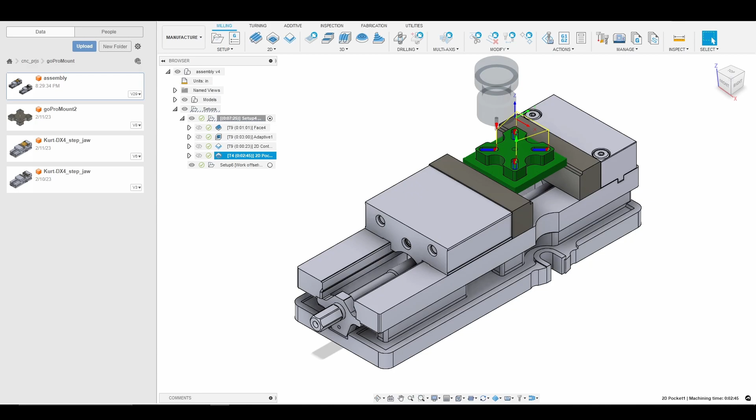Today we are going to go through some of the drill operations for our GoPro mount. So we're going to jump right in and go into our spot drilling operation. So we're going to go to drilling. I'm going to go into my 770m+ library and I'm going to select a 1/4 inch 140 degree spot drill.

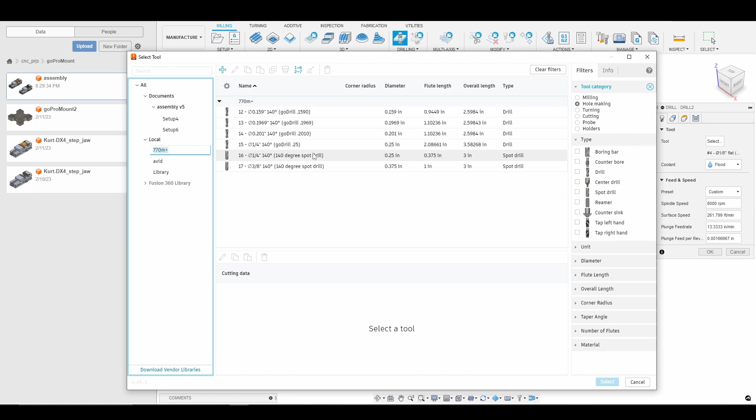Now remember that 140 degrees because here in a minute we're going to jump over to PowerPoint and do some basic trigonometry, so you want to remember that 140 degree angle. So we'll select that, we'll select OK. So we're going 8,000 RPM and we are plunging down at 13 inches per minute. We'll go to geometry and then we'll go ahead and select our hole.

Now our heights tab is going to be very important. So we want to make sure our bottom height is hole top. However, we will crash if we leave it at hole bottom. So this is a spot drill. We want to make sure we check hole top, and then we are going to go down minus 45 thousandths. And we will get into why we're going down 45 thousandths here in just a second.

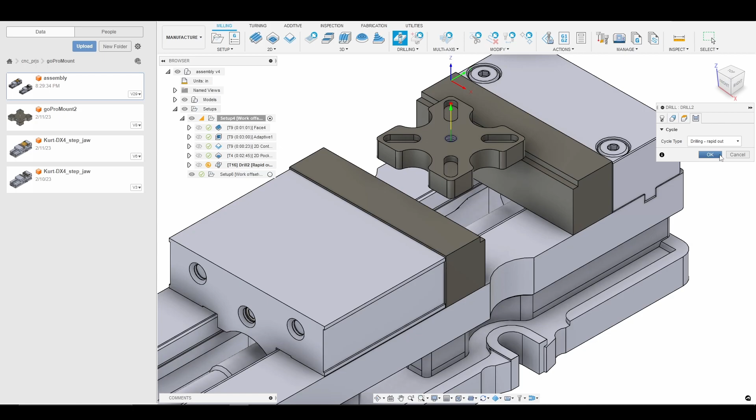Okay, so that should be fine. And our cycle, we're just doing a drilling with a rapid out. So we'll click OK. And now what I will do is go ahead and simulate. This will be very quick. We go down, we perform our spot, and then we go out. All right, so that's good. So what I'm going to do now is hop over to PowerPoint.

All right, so why did I go down into the stock 45 thousandths? So the first assumption I'm going to make is that we are making a 1/4-20 hole. So I'm going to assume the diameter of our hole is going to be 1/4 of an inch, which just happens to be the same diameter of our carbide spot drill. So I want to put the entire tip of the drill into the material. And so to do that, I need to find the height here, which is what I have labeled as X. And so to do that, we're going to use some basic trigonometry.

So you notice I have a line splitting the angle or the tip of the drill in two. Remember I said our drill point angle was 140 degrees. So if we split that angle in two, half of it is 70 degrees. We know from basic properties of triangles that all of the angles inside must add up to 180 degrees. So if we have 70, we have 90, and then we have 20, that is our 180 degrees. The next thing we need to remember is basic trigonometry.

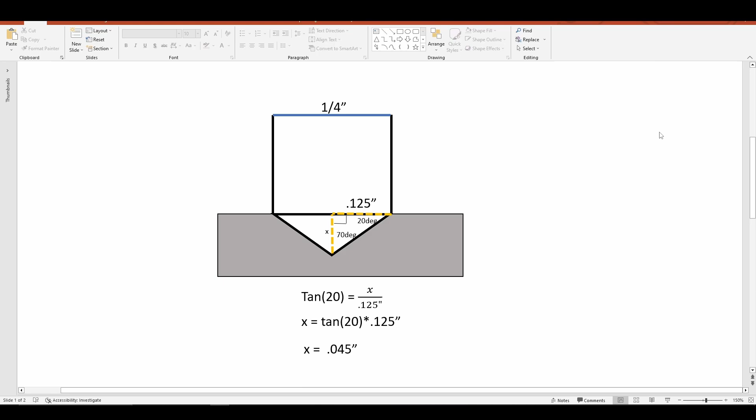All right, so now what we're going to want to do is drill all the way through our part and then through the bottom of our stock. And so to do this, I'm going to go for another drilling operation. And I am going to select my tool. So I'm going to go to my 770m+ library and select a Go drill that is 201 thousandths in diameter. So I'm going to click OK. We're going 4,000 RPM and we're plunging down at 15 inches per minute. We'll go to our geometry and select our hole.

We'll go to our heights tab. Again, our heights tab is very important. So we want to start at the top of the hole and we want to finish not at the bottom of the hole, but at the bottom of the stock. So we'll select stock bottom. And now what we also want to do is go ahead and put the tip of the drill through the bottom of our stock. So we'll hover over that so you can see what I mean.

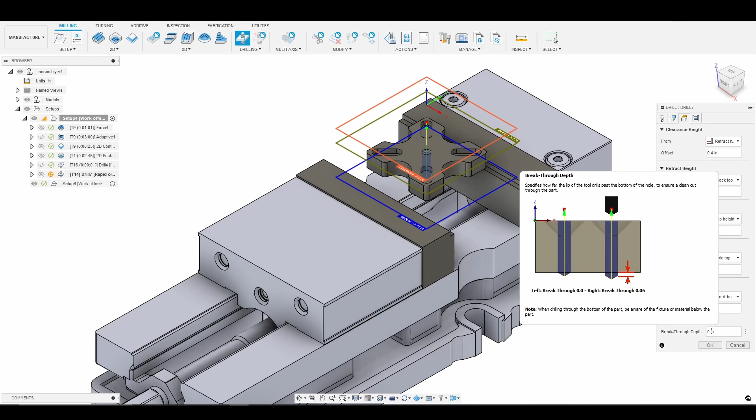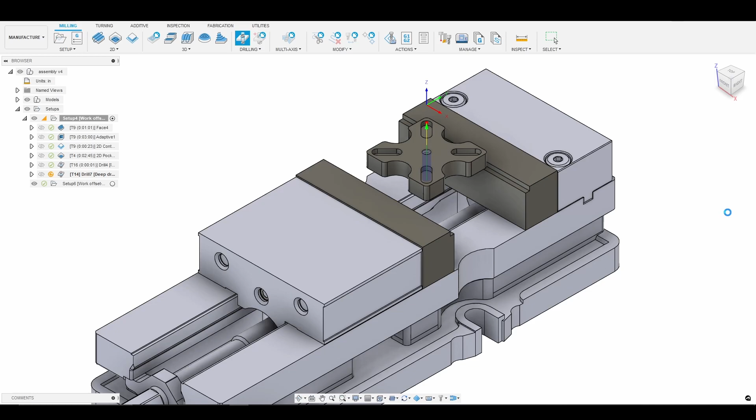So we'll select that. And then I'm actually going to add a breakthrough distance of 50 thousandths just to make sure that our drill point does indeed go all the way through the bottom of the stock. So I'll go ahead and do that. And then I will select OK after I go through the cycle. And we want to use a deep drilling with a full retract. I'm going to round the pecking depth to 50 thousandths, and I'm just going to set the minimum pecking depth to 30 thousandths. I'm going to click OK. And then what we'll do is we'll go ahead and simulate.

And I will go to the right side here. And what I'm going to do is actually just use the timeline to make it easier to control. So you see we're pecking in the center of our part. And what we want to make sure is that we go all the way through the bottom of our stock. So let's see if that happens.

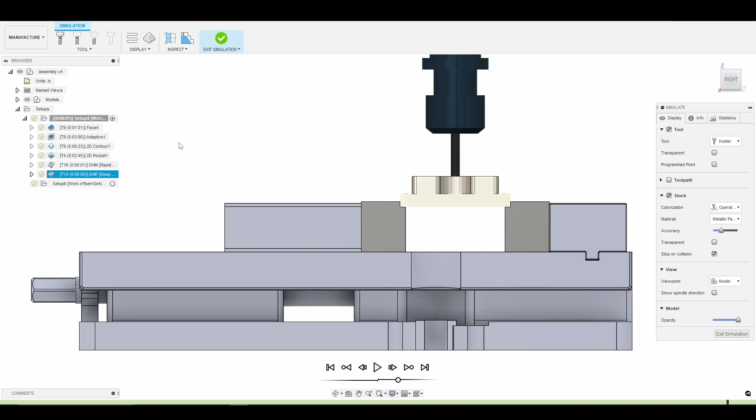There we go. So let's go back a little bit. There we broke through the bottom of our stock. And there we go, just a little deeper to get that breakthrough distance that we talked about. So I think our drilling operation there is fine. So we'll go ahead and exit. We'll go back to the home view.

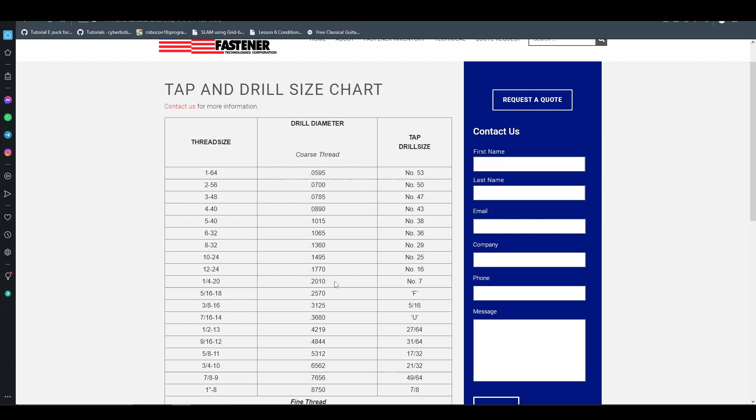So what we're going to do next is go ahead and chamfer around the top of the hole. And so I guess what's important to specify before we jump into that chamfer path is why I chose 201 thousandths for the diameter of the drill. So what you want to do is go to a drill and tap guide. So I pulled one up here from the internet. And if we go to the 1/4 hole, we can see that our drill diameter is 201 thousandths, which is exactly what I used. So that's how you would determine the size of the drill that you would use.

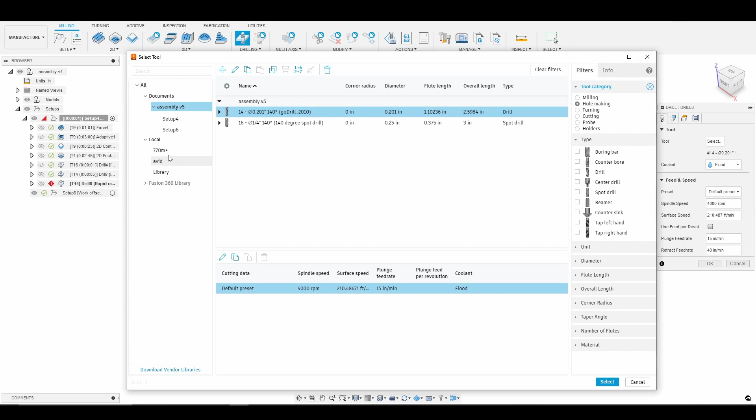Okay, so now we'll go back to Fusion, and what we'll do is go ahead and do another drilling operation, but this one is going to be slightly interesting because instead of a drill, we're going to use a chamfer tool. So drilling operation, we're going to select our tool. We're going to go to the 770M+ library, and you'll notice that our chamfer mills don't show up here. And so all we need to do is go to tool category, and instead of hole making, go ahead and choose milling. And then we will find our 3/8 inch 45-degree chamfer.

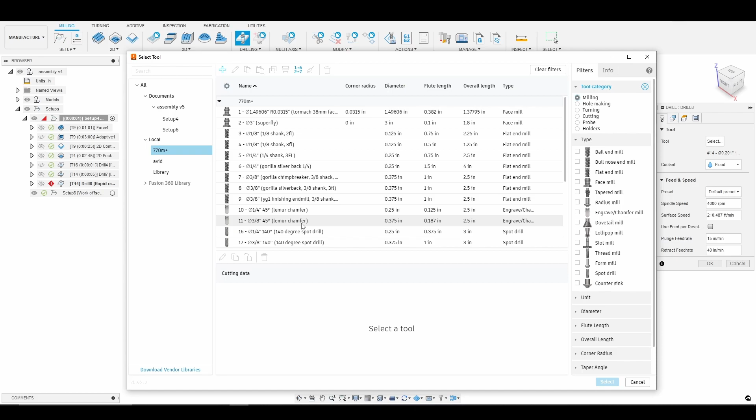Again, we want to put a chamfer on our 1/4 inch hole. All right. So we want our diameter of that chamfer to be wider than our hole. So we're going to use a 3/8 inch chamfer mill. So I will select OK. 4,000 RPM, 15 inches a minute. That's fine. We'll go to geometry.

All right. And the next thing I'm going to do is go to heights. Again, this is important. We don't want to crash into our stock. So we're going to use hole top. And for a bottom height, we're going to use hole top again. And for offset, we're going to use minus 130 thousandths. And I will explain that in detail again in just a minute.

But because the angle at the tip of our chamfer mill is 90 degrees, we can use a special property of a 45 degree 90 right triangle. And so what happens is if we go down half the diameter of the hole that we want to create, we will essentially be flush with the diameter of that hole. So for example, if we wanted our point to be flush with a 1/4 inch hole, we would just go down 1/8 of an inch.

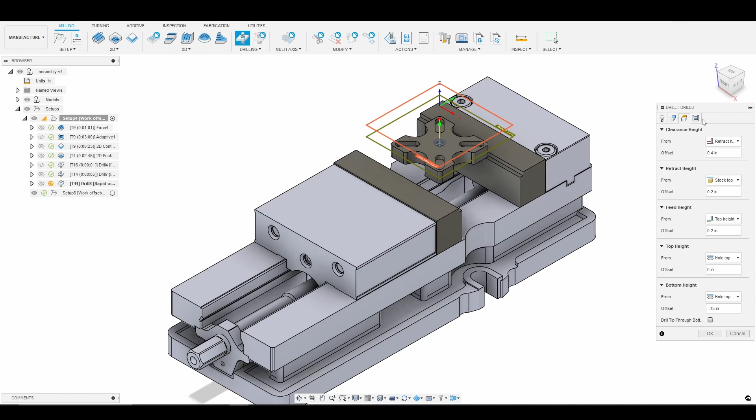So really, if I wanted the chamfer mill to be flush with our 1/4 inch hole, all I would have to do is go half of the diameter or the radius down, and we'll see that in detail here in a minute, and that would be flush with the diameter of our hole, but I'm going to go a little below that just to give us the chamfer. So I'm going 130 thousandths. And again, I'm going to explain that in detail here in just a second. That way nobody's confused. And again, we're just going to drill and rapid out.

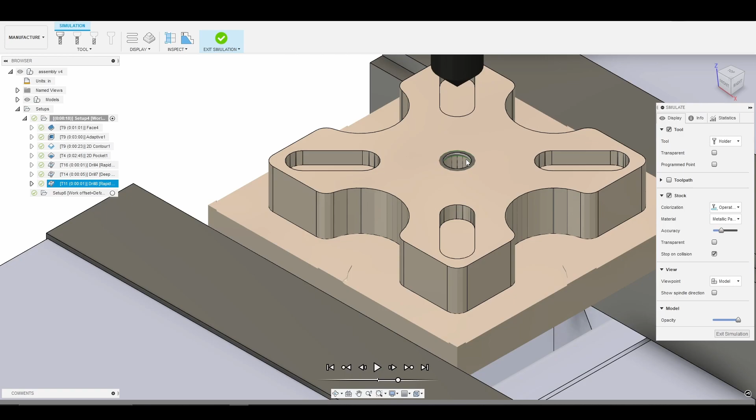So I'll press OK. And we'll go ahead and simulate, and the simulation is going to go fast. It's going to look identical to our spot drill. So we're just going to go down and out. There we go. And there you see it. We just sort of chamfered the hole. So we're going to exit the simulation, and then we'll jump over in PowerPoint, and I'll explain again why we chose the depth that we chose using the 90-degree chamfer tool.

Okay. All right, so again, we're going to do some basic trigonometry. So the difference this time is that our tool is bigger than our hole. So if we look at how our drill point is entering the stock, we're not going all the way down. We're not putting the entire drill point into the stock. So again, we're assuming our 1/4-20 hole is going to be a 1/4 inch in diameter, right?

And so if we split the drill point angle again, half of the diameter of our 1/4 inch hole would just be, again, 1/8 of an inch, or 125 thousandths, which I have drawn here. And so what we want to do is find the depth to go down with our chamfer tool that is now a 90-degree angle instead of 140 degrees.

And so we're going to do the same thing. So half the diameter of the hole, or the radius, is 125 thousandths. We're going to use basic trigonometry. So we split our 90-degree angle in two with the center line. So we have 45 degrees here, 45 degrees here, plus the 90 degrees gives us our 180 degrees. So all of our angles add up to 180 degrees.

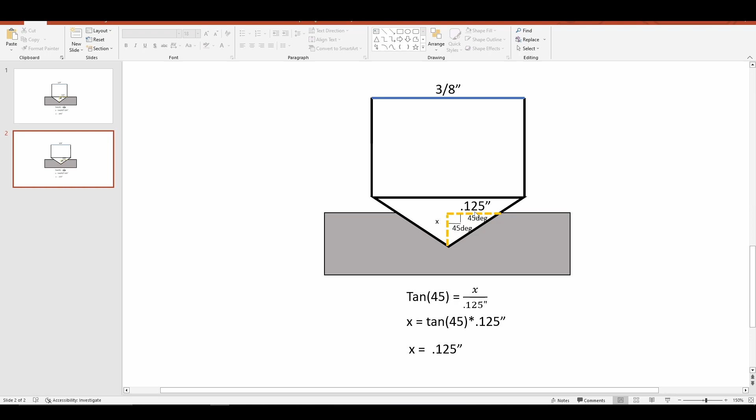And so what I did is I went down just a little further than that to make sure I got a chamfer on the edge of the material. So I went 130 thousandths instead of 125 thousandths. So that's why I went the depth that I went. So we'll go ahead and go back to Fusion 360 now.

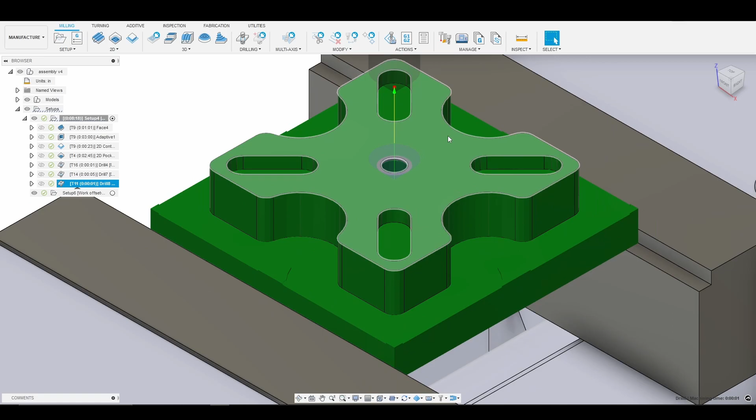And so now what we'll do is we'll go ahead and chamfer the pockets and around the outside of our part. And to emphasize putting the chamfer here, if you toggle back and forth between the drilling operation and the chamfer and just look at the stock, you can see that chamfer being done.

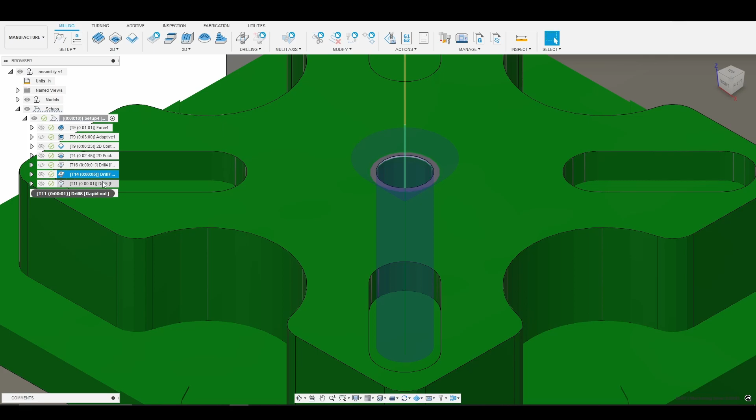Sometimes it's easier to just toggle back and forth between the stock just to see what's happening without going through simulation. So that's just an easy trick if you want to make sure that you really did put a chamfer on your hole. You can just toggle back and forth between two toolpaths and see how the stock changes. So now I'm going to go to 2D, and we're going to go to a chamfer. So we're going to click 2D chamfer.

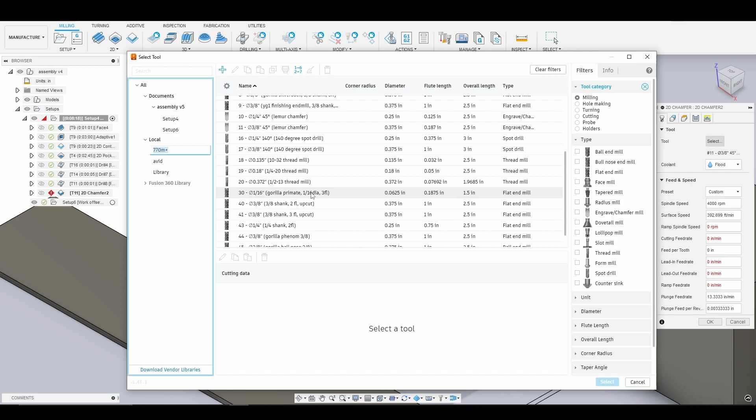We'll go select our tool. We're going to use the same 3/8 inch chamfer mill. So again, let me find it. There it is. We're going to select it, and we are at 4,000 RPM, 20 inches per minute. That gives us right around 1.25 thousandths per tooth. We'll go into our geometry. I'm going to select the contour around the top of the part, and I'm also going to select the contour around all of the pockets.

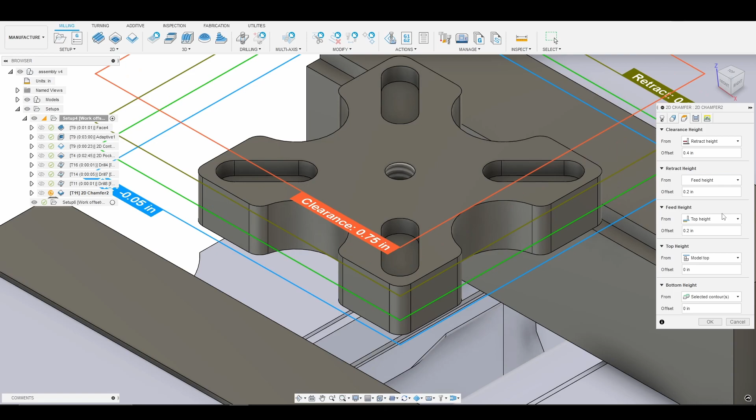We'll go to heights. Again, we've already removed all the material off the top of our part, so I want to be at model top, and I want our retract height to just be our feed height. So that's all good. And the next thing I'm going to do is choose a chamfer width. I like using 15 thousandths, so that's what I use. You can choose whatever makes you happy. You could use 10 thousandths, 5 thousandths, doesn't matter. I'm using 15 thousandths for this part. It's not critical. All right, I'm going to use smoothing and feed optimization.

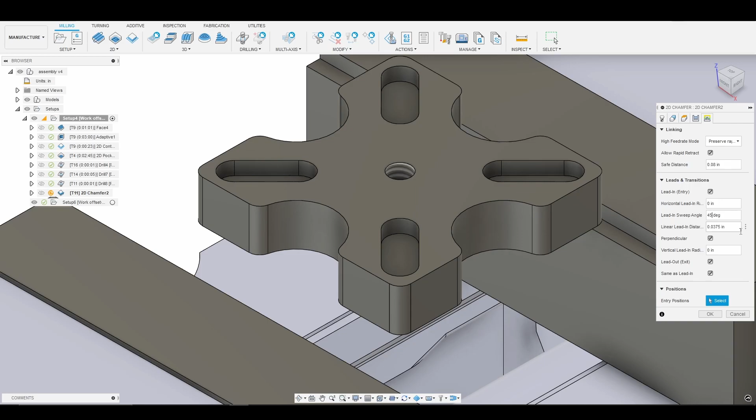We'll now go into linking. And I like coming in at a lead-in sweep angle of 45 degrees. Again, just a user preference. I'm going to click OK. And now we'll just go ahead and simulate this toolpath. So right-click and simulate. And again, I'm just going to move the timeline just because it's easier for me to control and show you guys what's happening.

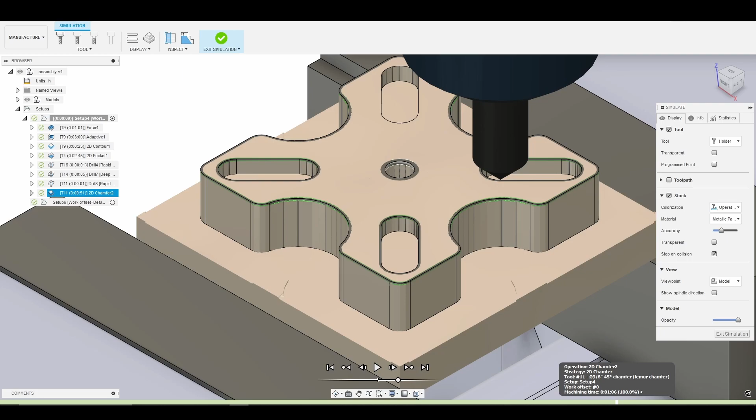Awesome. So we're just going around and chamfering the part. And now we're just finishing up those pockets. All right, that all looks good to me. So I'm going to go ahead and exit. And that does it for this tutorial. So again, we went through the drilling operations, and then we chamfered our part. So in the next tutorial, we will go over the thread milling.

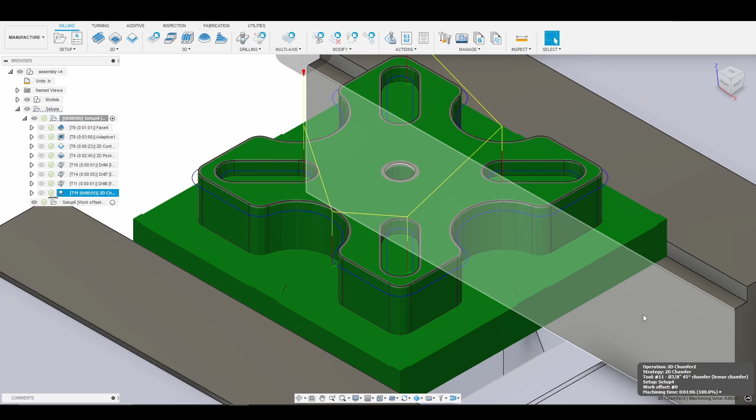Please like and subscribe. All right, so we'll jump right in with the spot drilling operation. Then we'll switch to a Kennametal GO drill and do the deep drilling with full retract, where we peck our way all the way through the part and through the stock. I like Kennametal GO drills, or really any drill that I can hold with a collet and a tool holder. I am not a big fan of the drilling chucks, so I prefer not to use them.

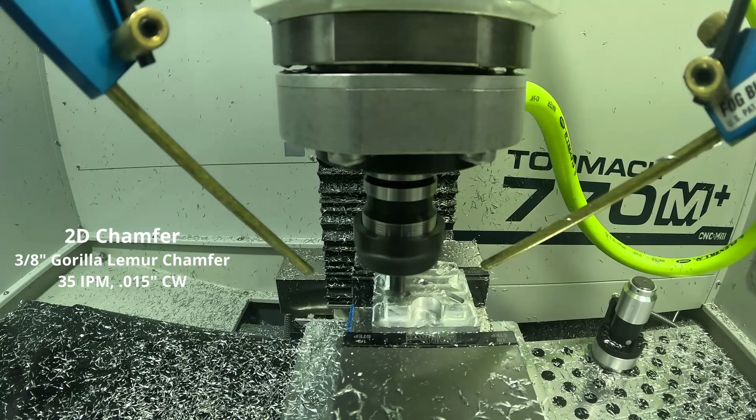Now we're going to use the chamfer mill, chamfer the top of the hole, and then chamfer the pockets and the rest of the part. So that does it. Please go ahead and enjoy the Tormach finishing the chamfer path.